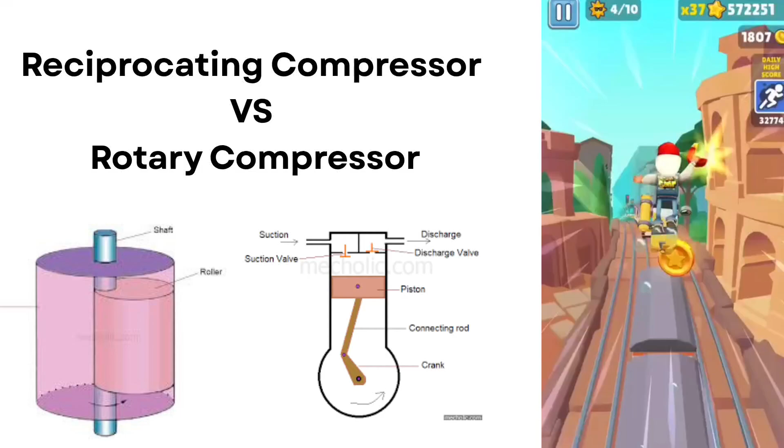Good day everyone. For this part, I will discuss the reciprocating and rotary compressor.

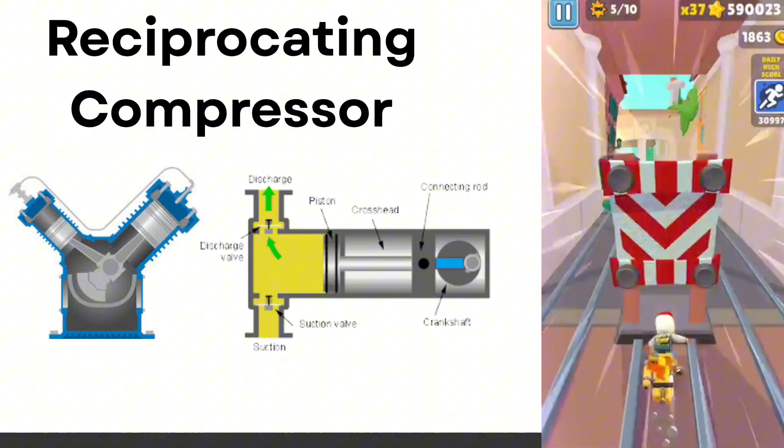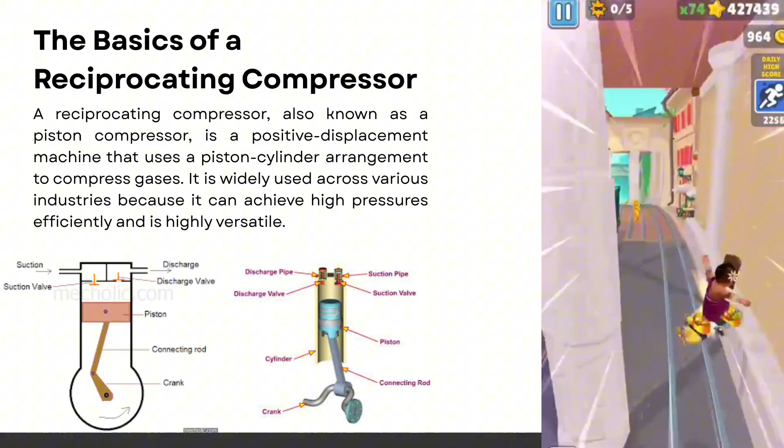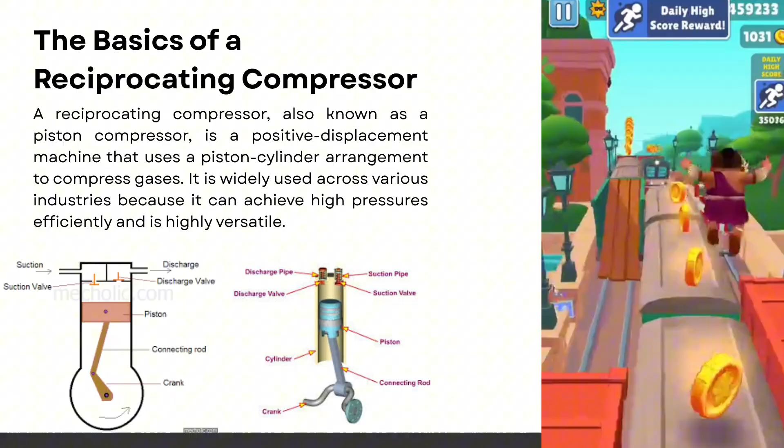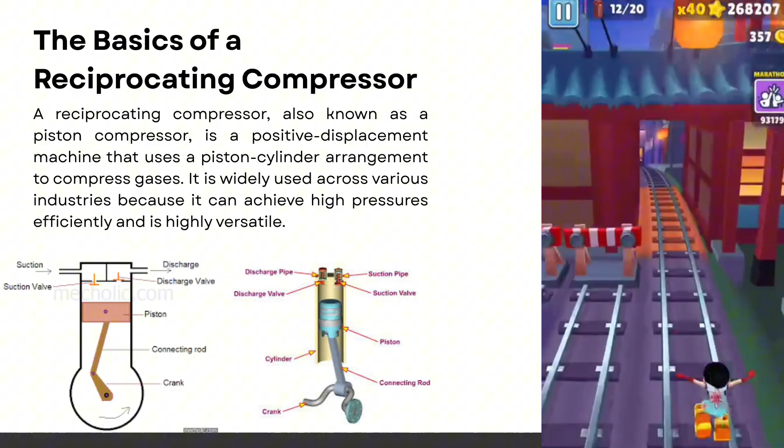First, let's discuss the reciprocating compressors. The reciprocating compressor, also known as a piston compressor, is a type of positive displacement machine. This means it compresses gas by trapping a fixed amount and then reducing the volume to increase the pressure. It uses a piston and cylinder, similar to an engine. As the piston moves up and down, it compresses the gas inside. It's widely used because it can produce high pressure, is efficient, and is flexible for use in various industries like refrigeration and industrial systems.

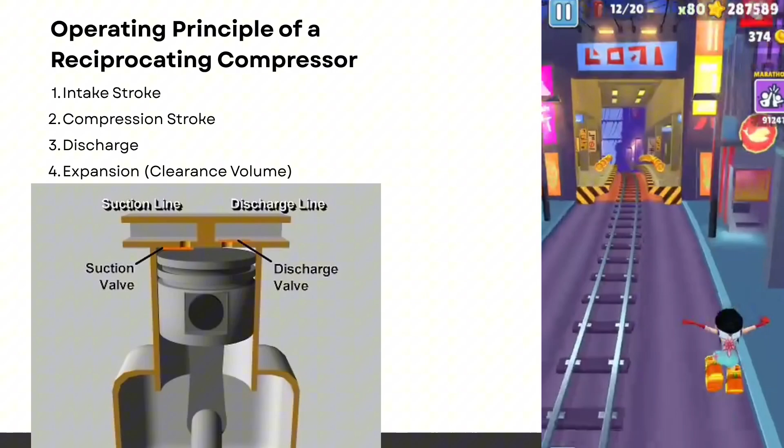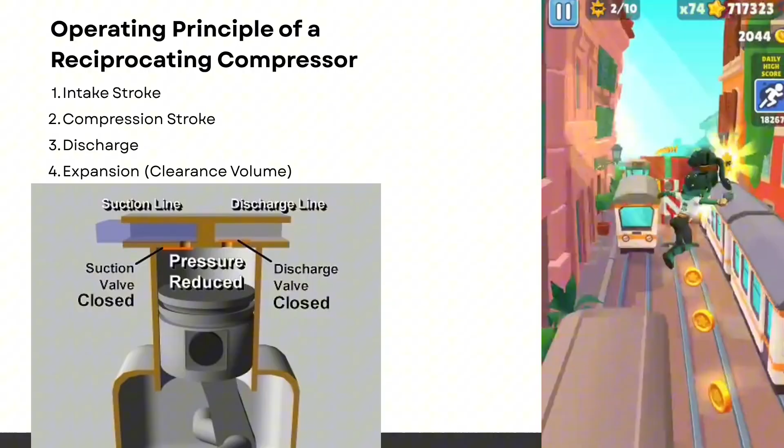Next, let's talk about how it works. There are four main processes in a reciprocating compressor. First is the intake stroke. Here, the piston moves downward, increasing the space inside the cylinder. Because the pressure decreases, gas enters through the suction valve.

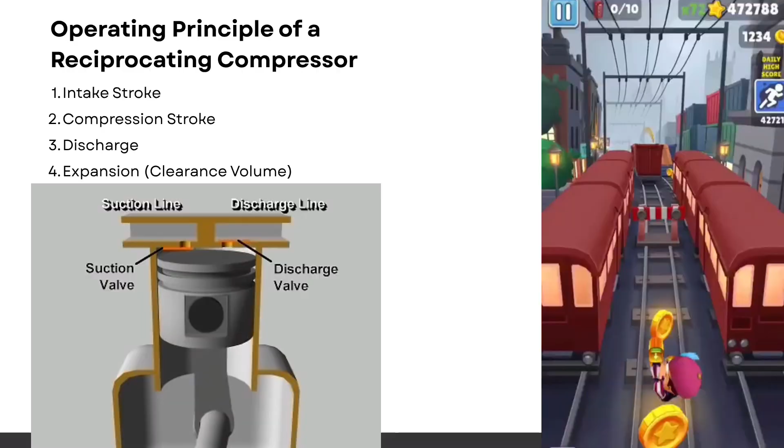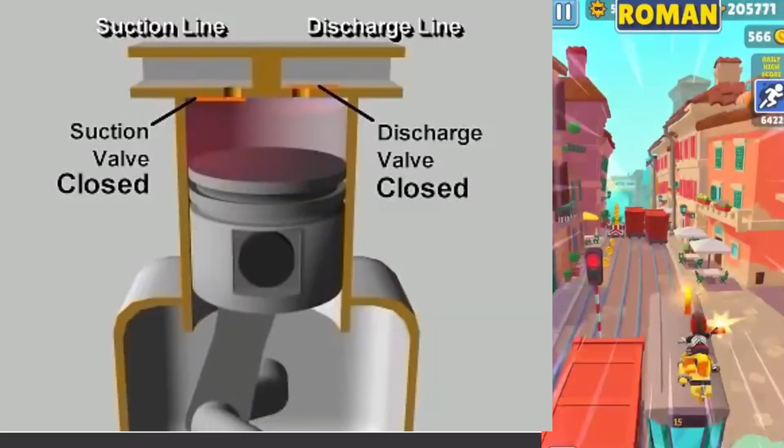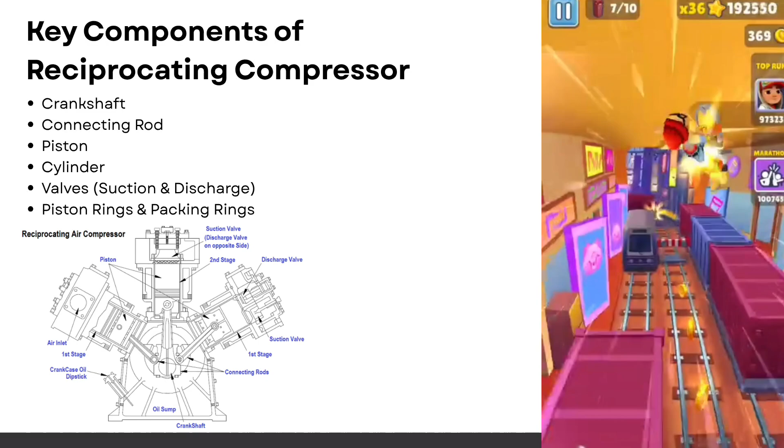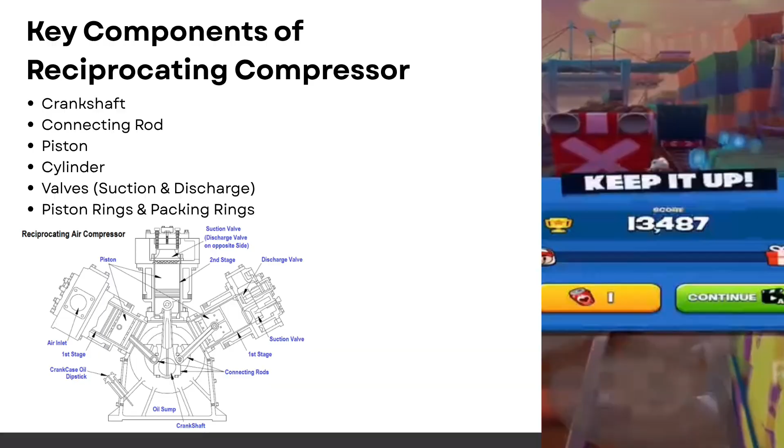Now let's identify the main parts of the reciprocating compressor. The crankshaft converts the rotation of the motor into up and down motion. The connecting rod links the crankshaft and piston, transferring the movement. The piston is the part that moves inside the cylinder and directly compresses the gas. The cylinder is the chamber where compression happens, designed to handle high pressure.

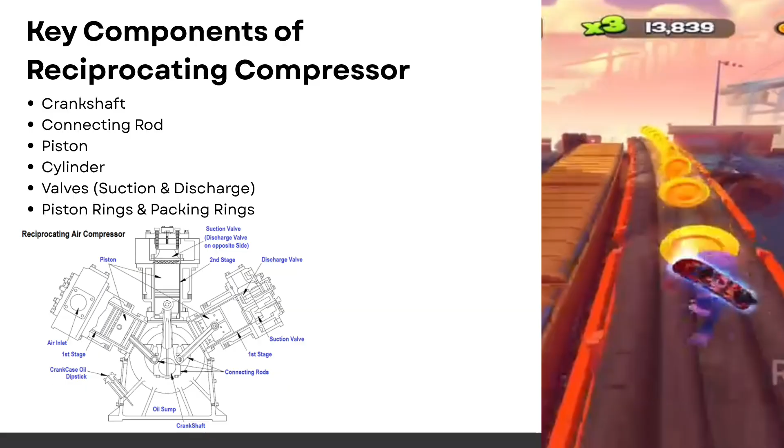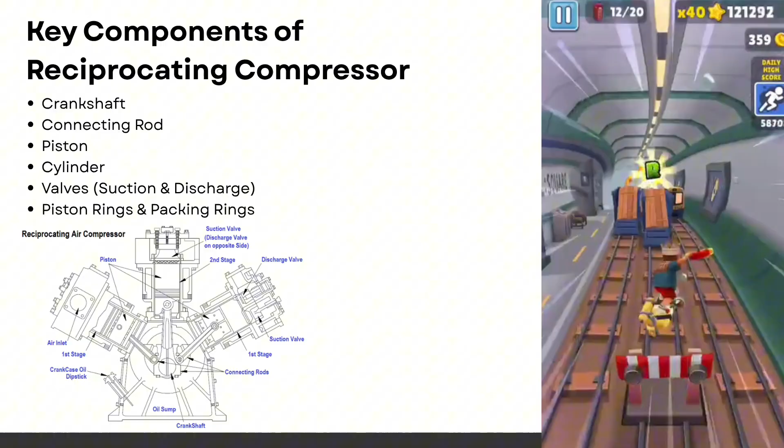The suction and discharge valves control the flow of gas, automatically opening and closing depending on the pressure. Lastly, the piston rings and packing rings seal the system to prevent gas leakage during compression. All these parts work together to make the compression process efficient.

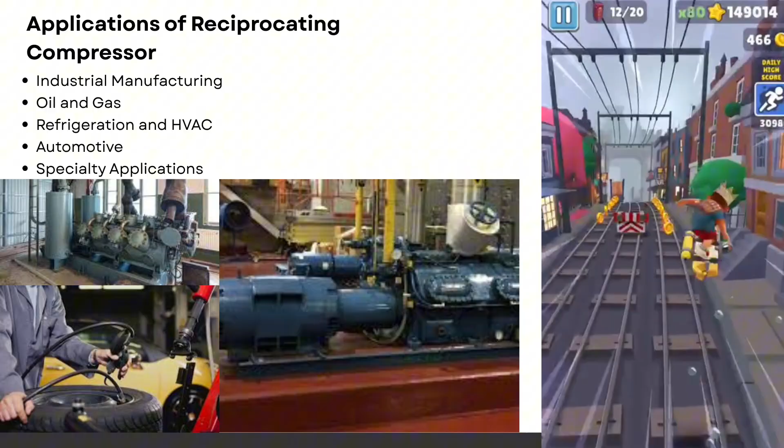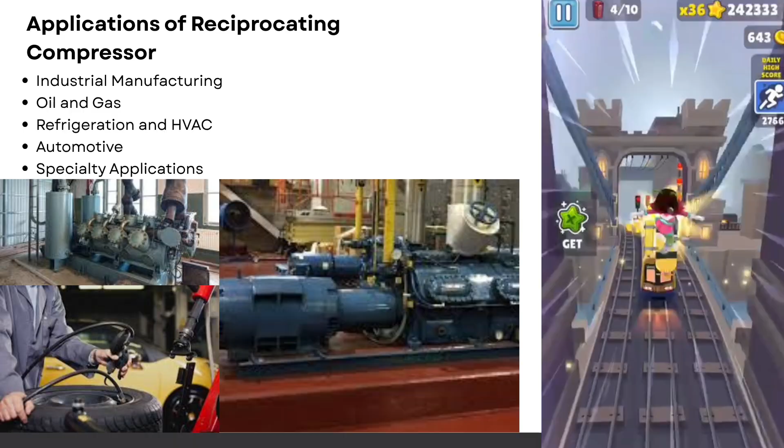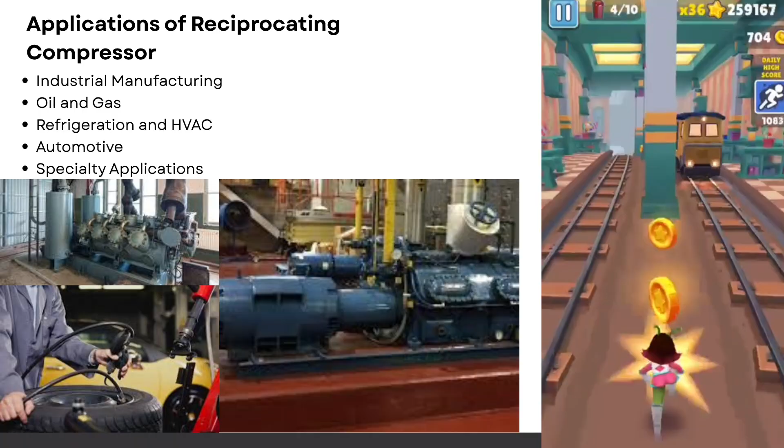There are many applications for the reciprocating compressor. In industrial manufacturing, it's used to power pneumatic tools and machines. In the oil and gas industry, it's used in processing and transporting natural gas. In refrigeration and HVAC, it's important for compressing refrigerant in air conditioners and cold storage systems. In automotive, it's used for tire inflation, spray painting, and other shop tools. It also has special applications like making plastic bottles and welding and cutting. Basically, it's used wherever compressed air or gas is needed.

Lastly, let's discuss the types of reciprocating compressors. First is single stage and multi-stage. In single stage, compression happens only once. In multi-stage, there are multiple steps of compression, resulting in higher pressure and efficiency. Second is single acting and double acting. In single acting, only one side of the piston is used. In double acting, both sides compress, resulting in higher output.

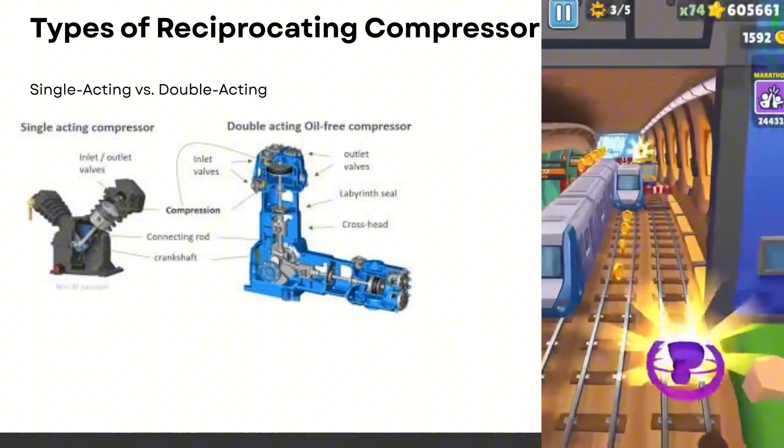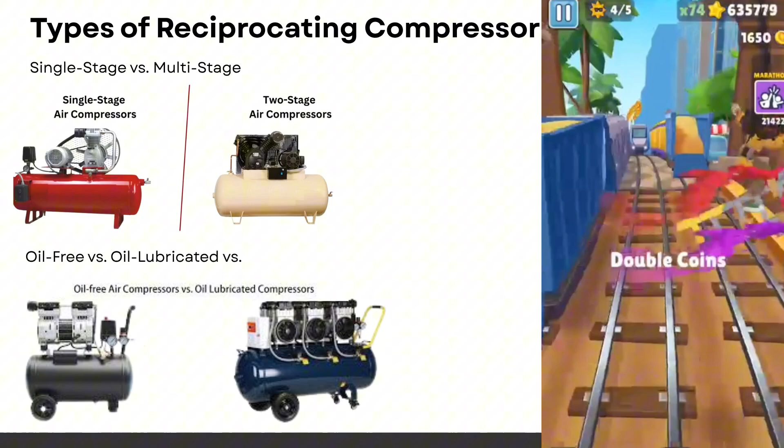Third is oil lubricated and oil free. Oil lubricated uses oil to reduce friction and wear. Oil-free has no oil, so the output is cleaner, used in food and medical applications. Depending on the application, we choose the right type of compressor.

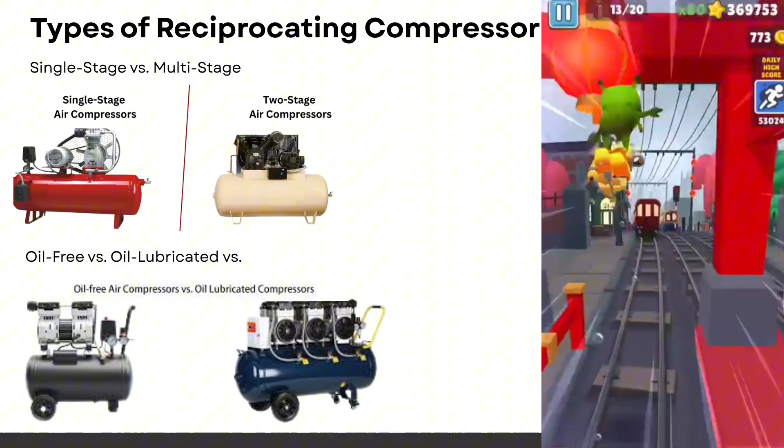To summarize, the reciprocating compressor is an efficient and powerful machine that uses piston motion to compress gas, and it is widely used in various industries.

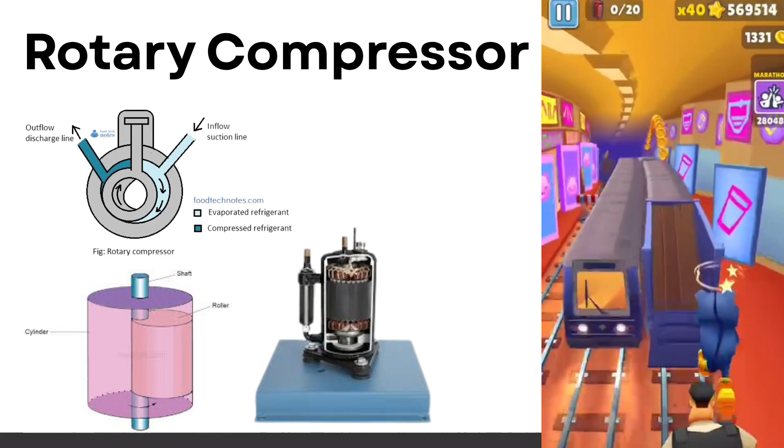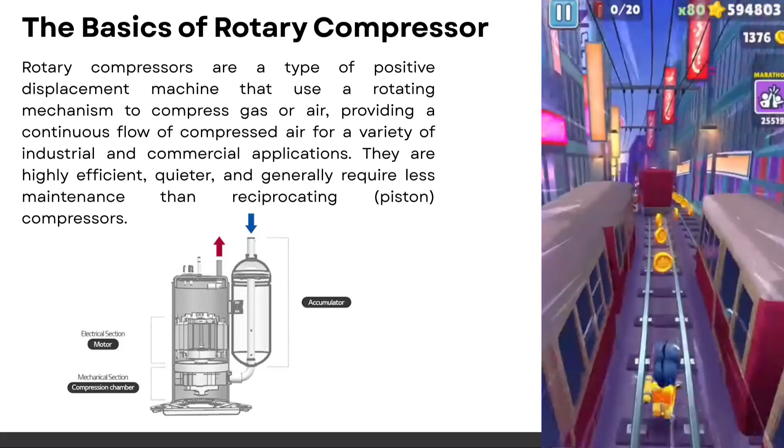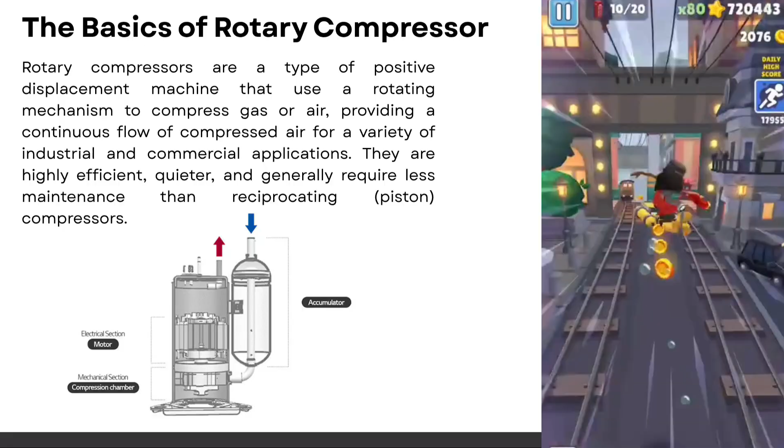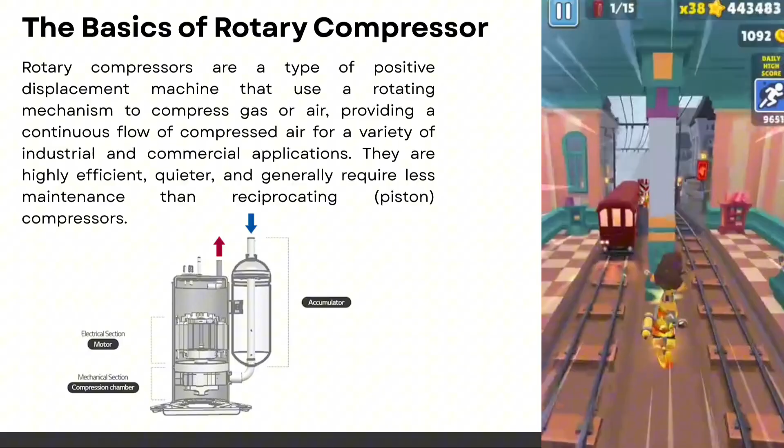Next, for this part, I will discuss the rotary compressor. The rotary compressor is another type of positive displacement machine, similar to the reciprocating compressor. But the main difference is instead of using a piston moving up and down, it uses a rotating mechanism to compress gas. Because the rotation is continuous, the flow of compressed air is also continuous, making the operation smoother compared to a reciprocating compressor. It's also quieter, more efficient, and requires lower maintenance, making it very common in industrial and commercial applications.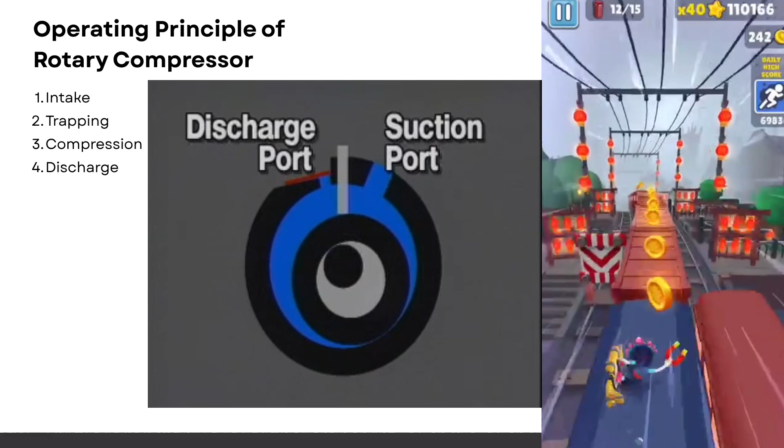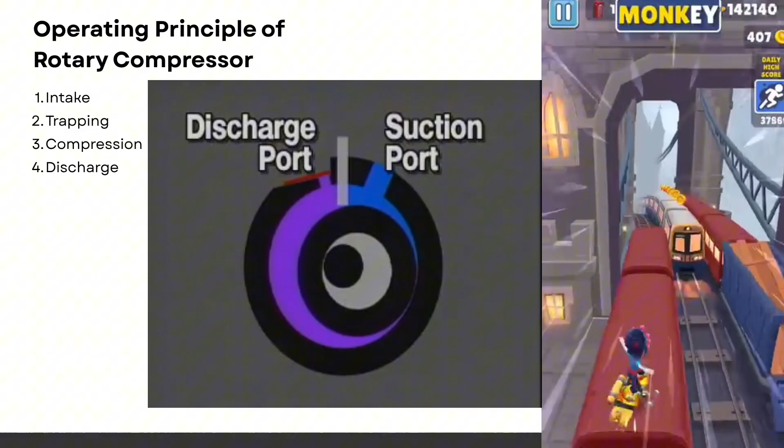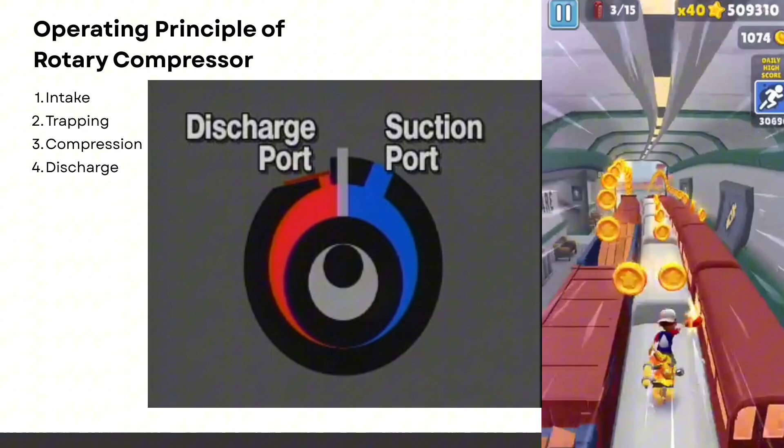Now let's go deeper into the working principle of the rotary compressor. First, the intake process: air enters the compression chamber through an inlet, port, or valve. Next is trapping: rotating parts like screws or vanes spin and trap the air inside the chamber. Then comes the compression stage: as the components continue to rotate, the volume of the space where the air is trapped decreases. According to Boyle's law, when volume decreases, pressure increases. This is how compressed air is created.

Finally, the discharge process: once the air reaches the desired pressure, it's pushed out through the discharge port toward a storage tank or directly into the system. So in simple terms: air enters, gets trapped, is compressed while rotating, then is released. The advantage of this is that the process is continuous, unlike the cyclic piston type in the reciprocating compressor.

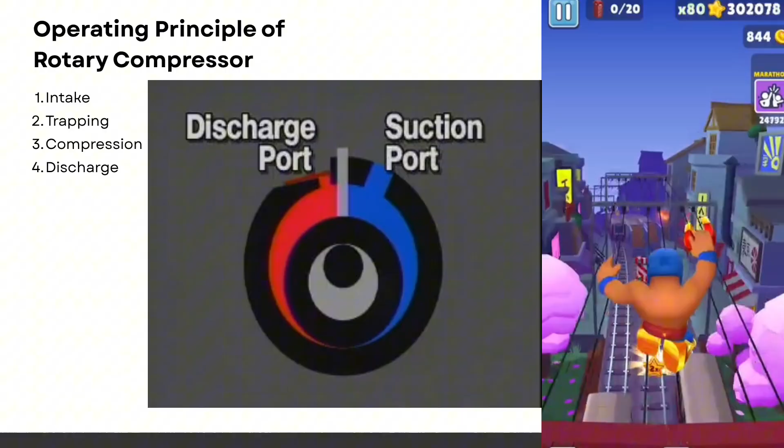There are many applications for the rotary compressor due to its continuous and efficient operation. In manufacturing, it's used for powering pneumatic tools, automated machines, and conveyor belts. In HVAC and refrigeration, it's very common in air conditioners, heat pumps, and cold storage systems. In the automotive industry, it's used for equipment like pneumatic lifts, spray painting, and tire inflation.

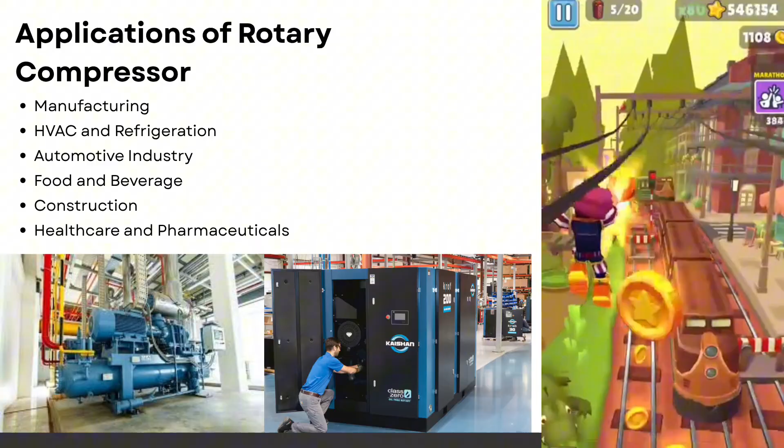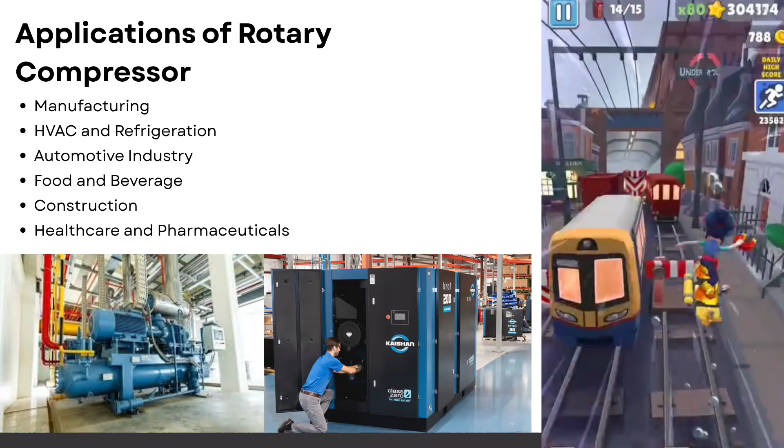In the food and beverage industry, it's important because it can provide clean, contamination-free air for packaging and bottling. In construction, it's used for portable tools like jackhammers and nail guns. And in the healthcare and pharmaceutical industry, it's used in ventilators, dental tools, and sterile packaging systems. So we can see that it's very versatile and used in many critical applications.

Now let's discuss the different types of rotary compressors. First is the rotary screw compressor. Ito ay gumagamit ng dalawang helical rotors, male and female, na umiikot in opposite directions. Habang umiikot sila, nako-compress yung air sa pagitan nila. Ito ang pinaka-common type sa industrial use.

Second is the rotary vane compressor. Dito naman, may rotor na naka-mount eccentrically inside a cylinder at may vanes na nagsa-slide in and out. Habang umiikot, nahati yung space at naiipit yung air, kaya nako-compress.

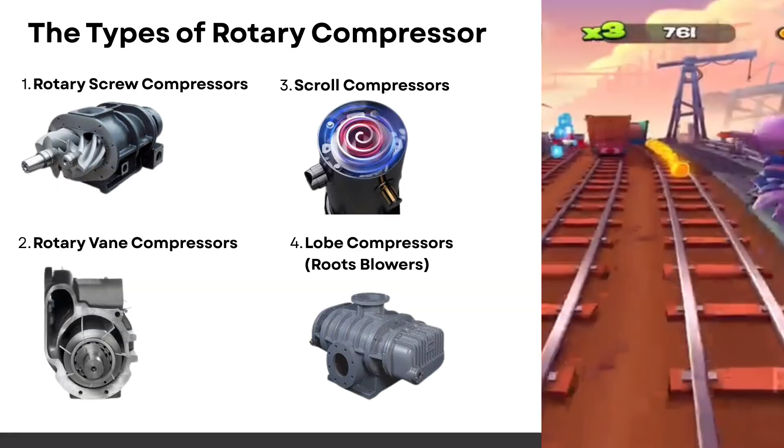Third is the scroll compressor. Gumagamit ito ng dalawang spiral shapes, isa stationary at isa umiikot. Habang gumagalaw, unting-unting naiipit at nako-compress yung air papunta sa center. Common ito sa air conditioning systems.

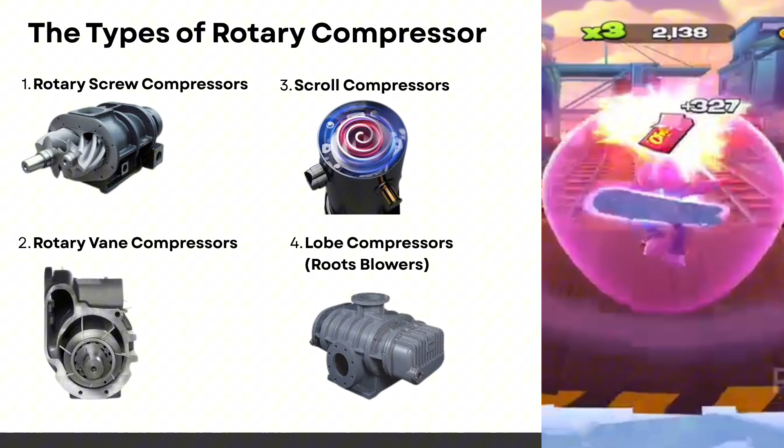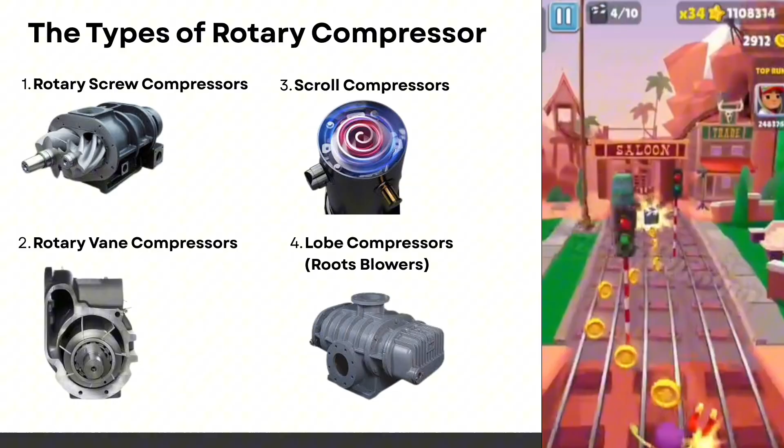And lastly is the lobe compressor or roots blower. May dalawang lobe na umiikot without touching each other. Hindi siya nagko-compress internally, pero tinutulak niya yung air from inlet to outlet, kaya nagkakaroon ng pressure. Each type has its own design and ginagamit depende sa application.

To summarize, ang rotary compressor uses rotating elements to compress air continuously, making it more efficient, quieter, and suitable for applications that require steady airflow.

Para sa difference ng reciprocating and rotary compressors, here is the simple video. Watch.

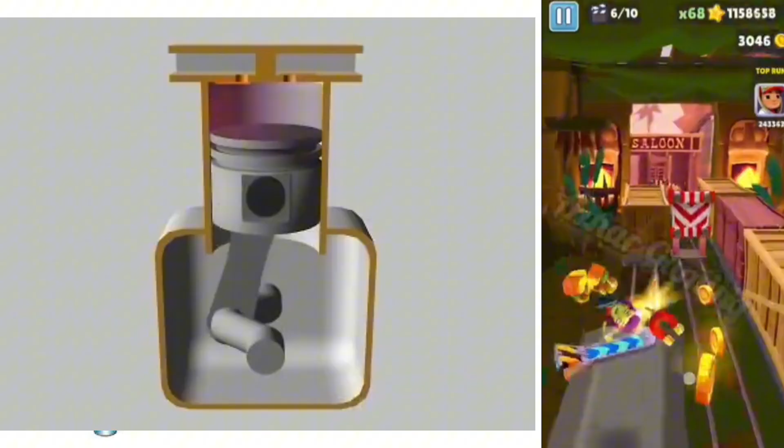A reciprocating compressor compresses refrigerant vapor in a cylinder using a piston. In a way, reciprocating compressors are like automobile engines. The pistons are directly driven through a wrist pin and connecting rod from a crankshaft. Depending on their size, reciprocating compressors may have one or more cylinders.

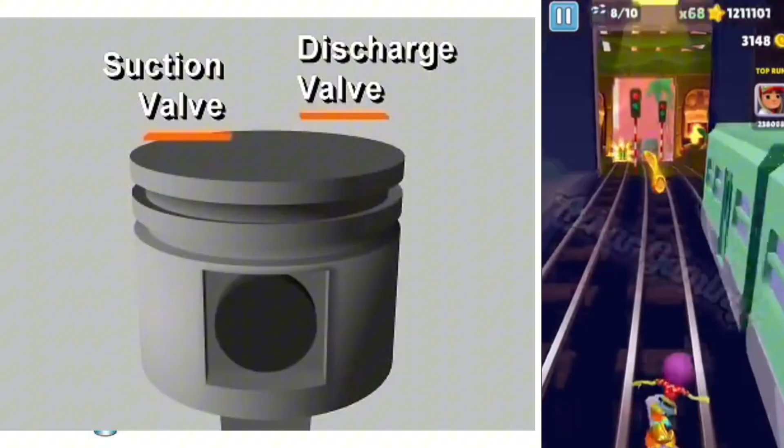Multiple cylinders may be arranged in line, opposed, or in a V. In each cylinder, reciprocating compressors have both a suction valve and a discharge valve. These valves give the compressor its ability to pump refrigerant vapor against a pressure difference. They are usually located in the head of the cylinder, in passages connected to the high or low pressure side of the system.

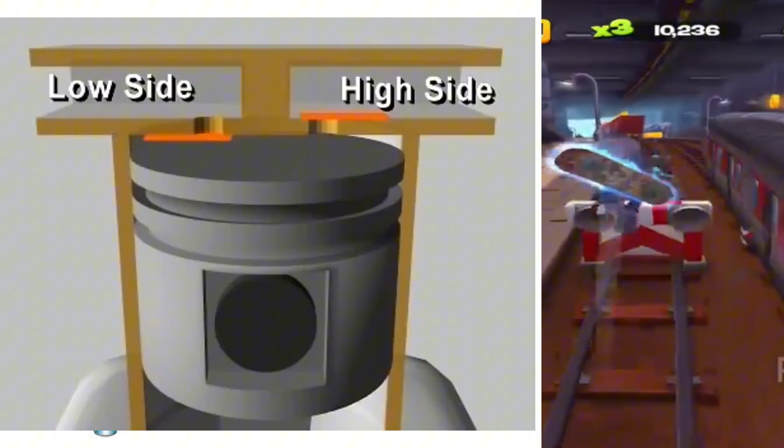Let's follow the compression process in a single-cylinder reciprocating compressor during one complete revolution of the crankshaft. Starting with the piston at the top of its stroke, or at top dead center, the piston begins to move downward as the crankshaft rotates. Because both valves are closed, the downward moving piston reduces the pressure in the cylinder.

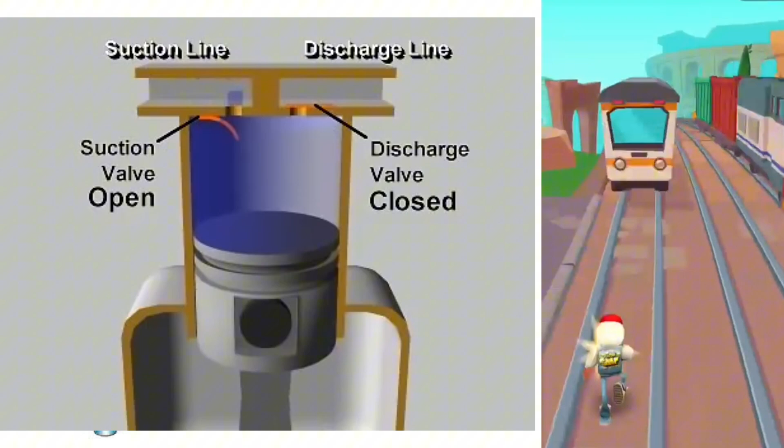As the pressure in the cylinder falls below the low side pressure in the suction line, the pressure difference opens the suction valve, letting refrigerant vapor flow into the cylinder. The piston continues down and pulls in more vapor until the cylinder is filled with low-pressure vapor at the bottom of its stroke. Once past bottom dead center, the piston begins its upward stroke.

The suction valve closes. As the piston moves up, it reduces the volume of the space in the cylinder, increasing the pressure of the vapor. When the pressure in the cylinder exceeds the high side pressure in the discharge line, the pressure difference pushes the discharge valve open, letting the compressed vapor flow out of the cylinder.

This continues until the piston reaches the top of its stroke and most of the compressed vapor has been expelled into the discharge line. When the piston begins its downward stroke, the discharge valve closes. The complete cycle then repeats during each revolution of the crankshaft. This is the mechanical positive displacement vapor compression cycle using a reciprocating compressor.